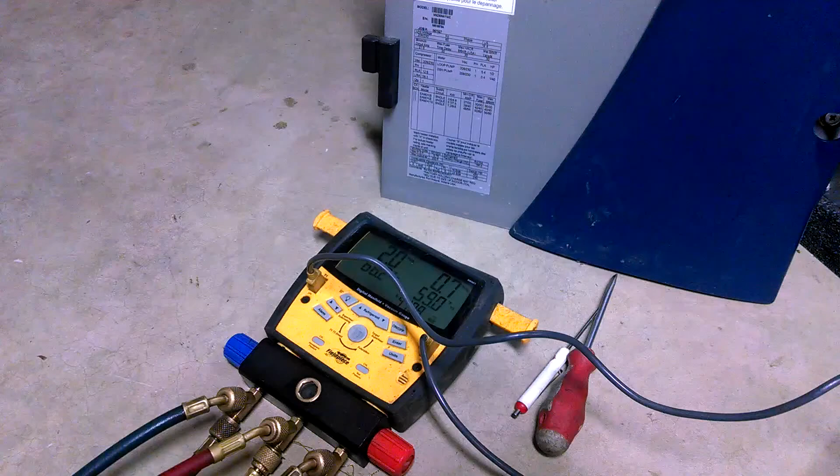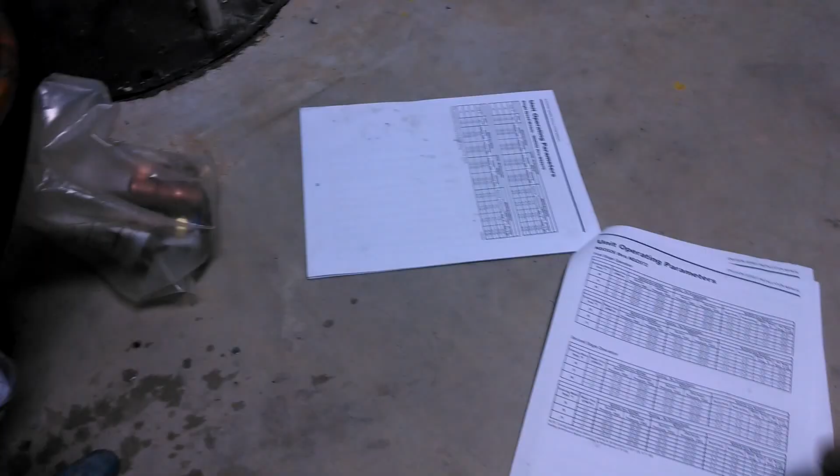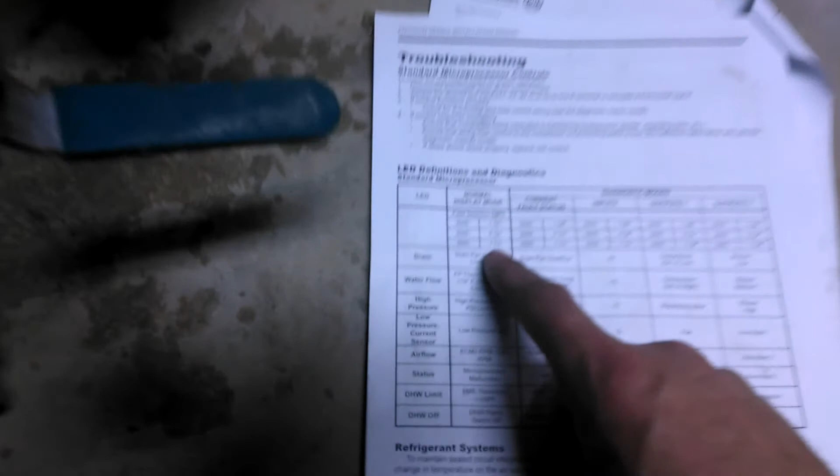I love them, you can do a lot of cool things, and what I'm going to go over is the dip switches. Only thing you really have to remember with these is SW21, SW26, and SW27. Very easy to service these things.

So come up here, this is normal display. SW21 is on. I got it all, I got this. Service it. Okay, that's normal display.

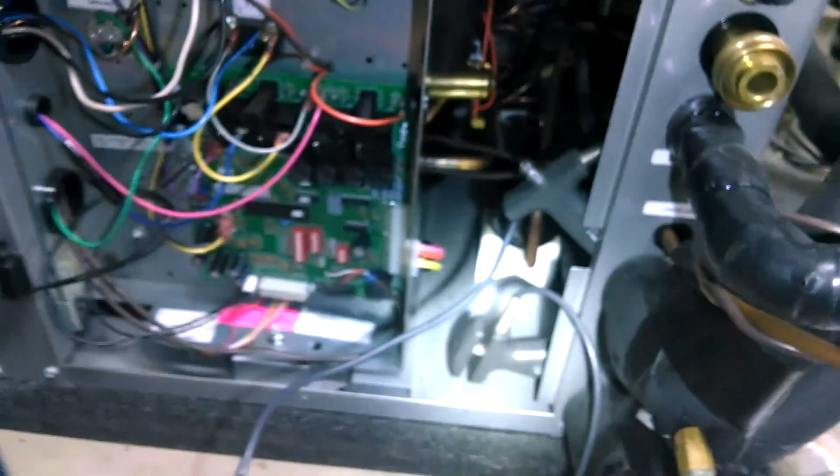On, okay. So what you're going to want to do to go into a current fault, very easy: one is off, one is on. This will put you in a service mode where you will shorten your delays. So there are no faults.

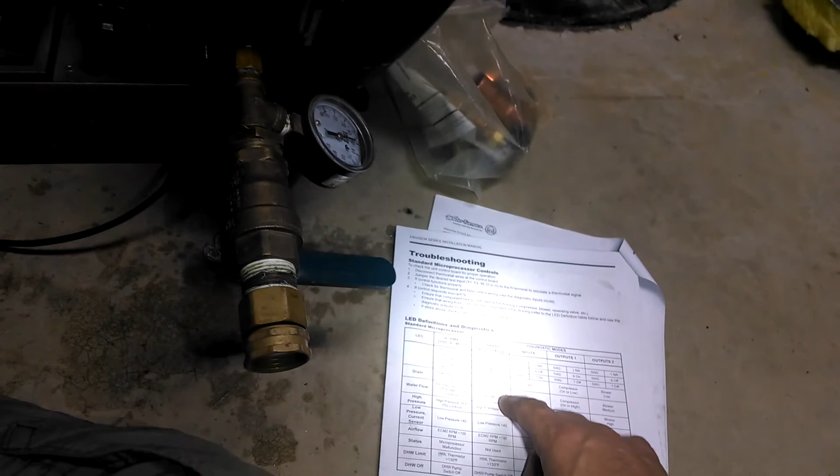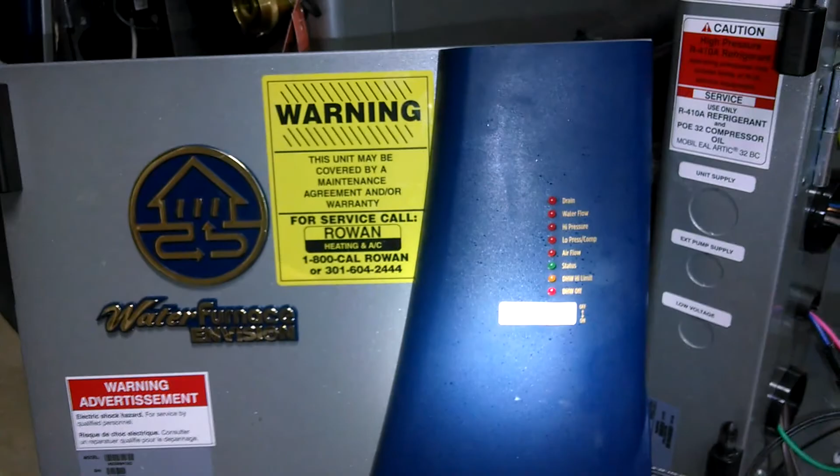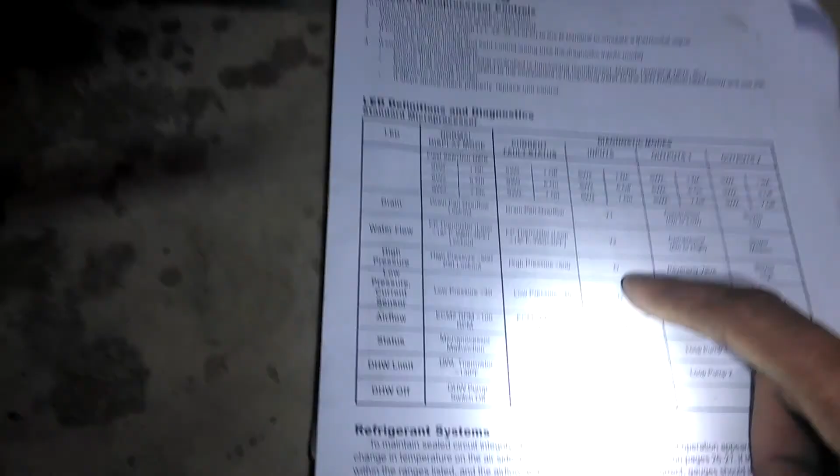So let's go to inputs. Off, on. This will tell us what our inputs are on. So we have drain, water flow, high pressure. We have Y1, Y2, and O.

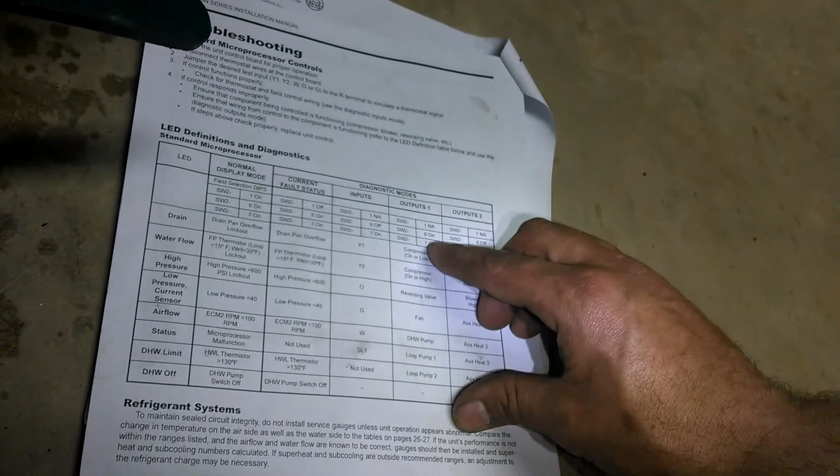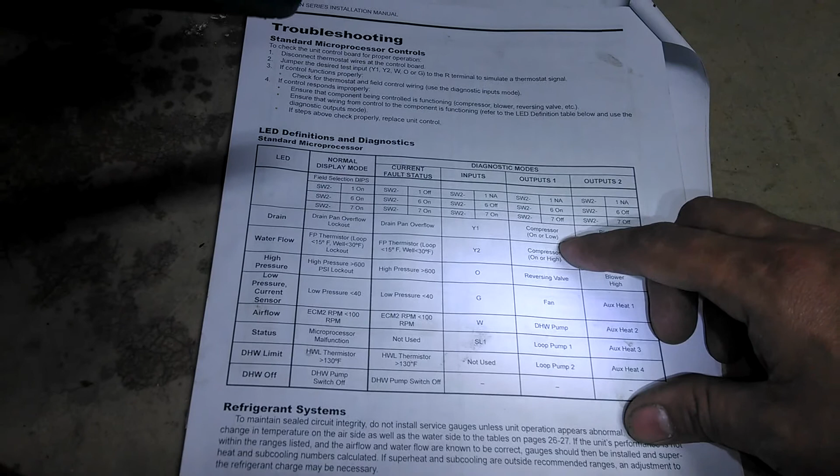Okay, let's go to outputs. Outputs, on, off. So we gotta switch these two. So let me make sure, on, off. We have drain, high pressure, low pressure, and status: drain, compressor on low, high pressure, reversing valve, fan, and loop 1.

Okay, so yeah, that's how to work that. The reason why the top, SW1, is NA here is because it doesn't matter. Leave it in the service mode, the off position. Leave it on the off position. It'll shorten the delays and really help you out when you're servicing the system.

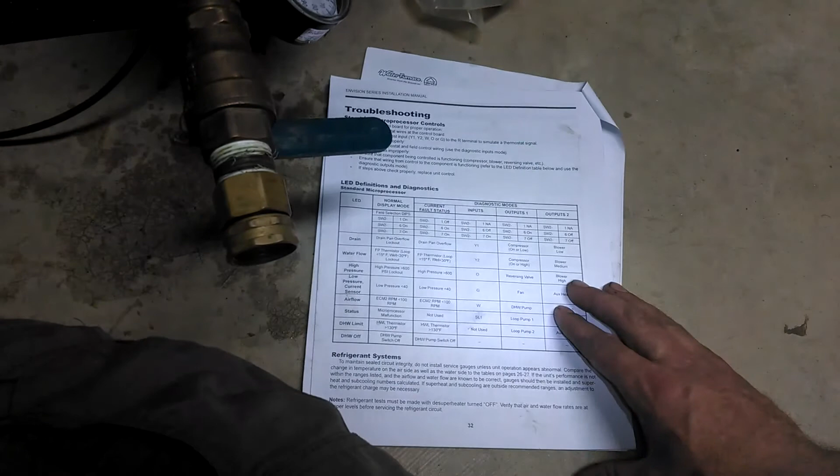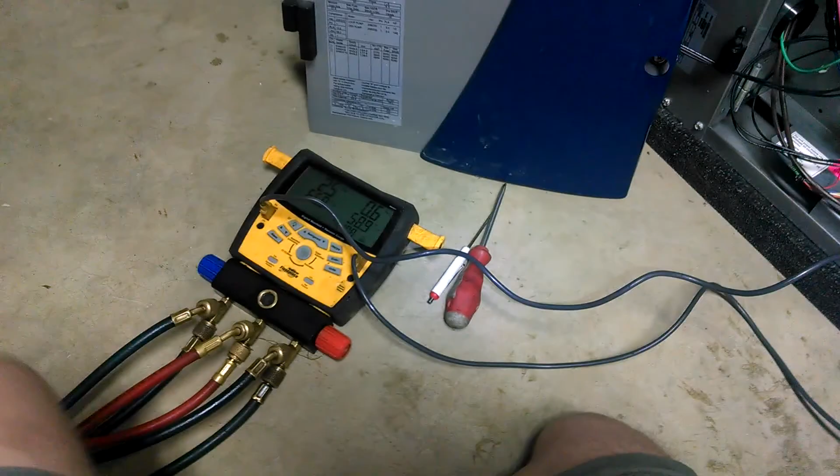Okay, so far as checking them out, everyone says, oh, I never hook my gauges up to a Geo unit. Well, I do. It's very convenient to have. I hook these up, my temperature probes right up to my loops. These are metal.

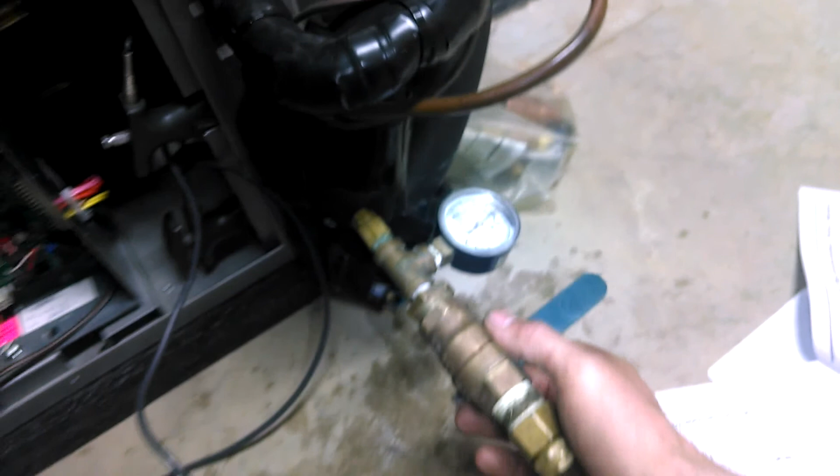Okay, this is giving me the temperature drop across, and this is just residual refrigerant from before, but this will give me my temperature drop across my loop, which is very helpful when you are trying to figure out if your flow is right, which will tell you everything. So what we do here, we have 47 psi. And we will go down here.

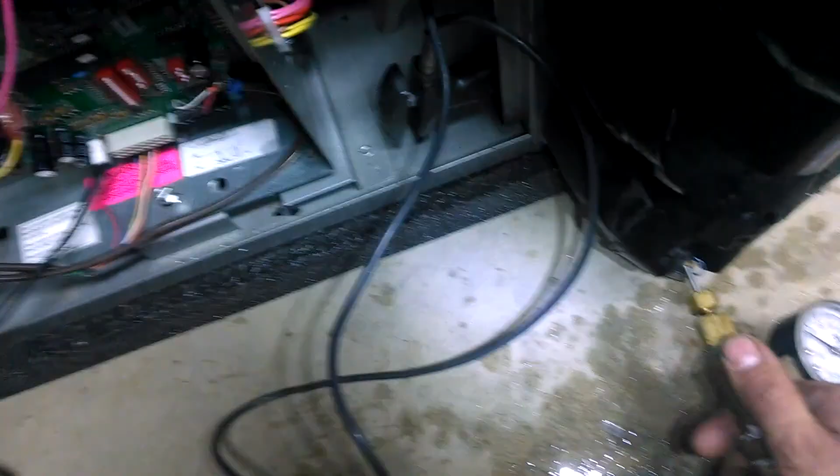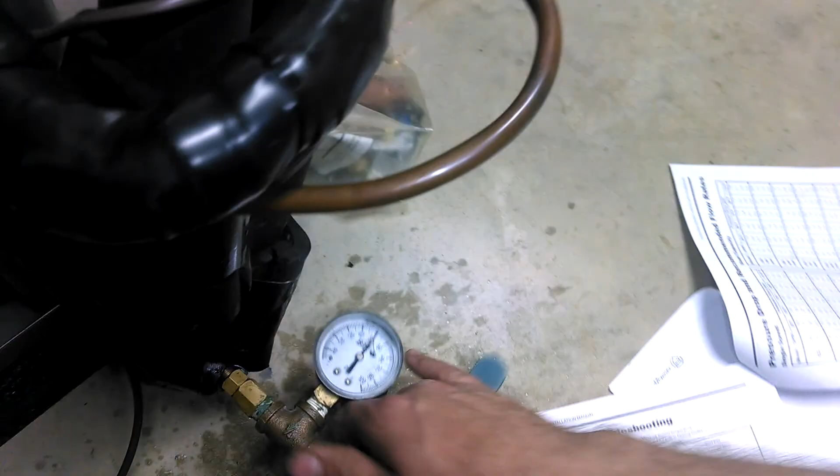This one's a little bit of a pain. If you want to slide these in as smooth as possible, you do not want to break that needle in there, it'd be a major pain. So we have 50 psi. So 50, 51. So we have about a 4 psi drop with a 50 entering.

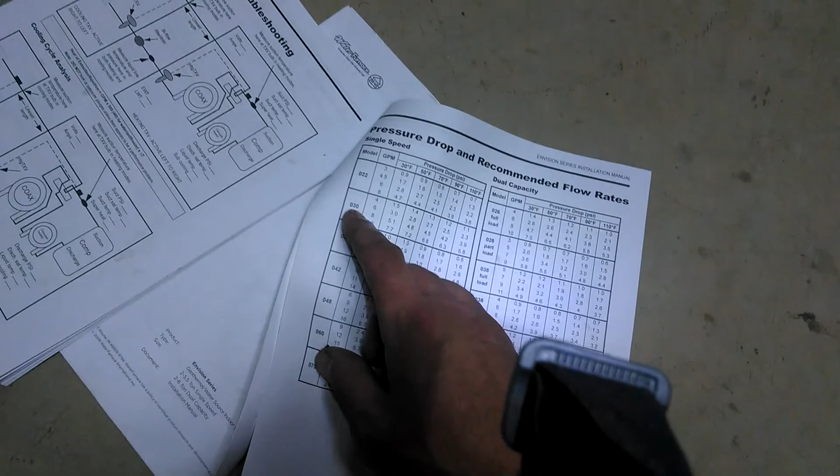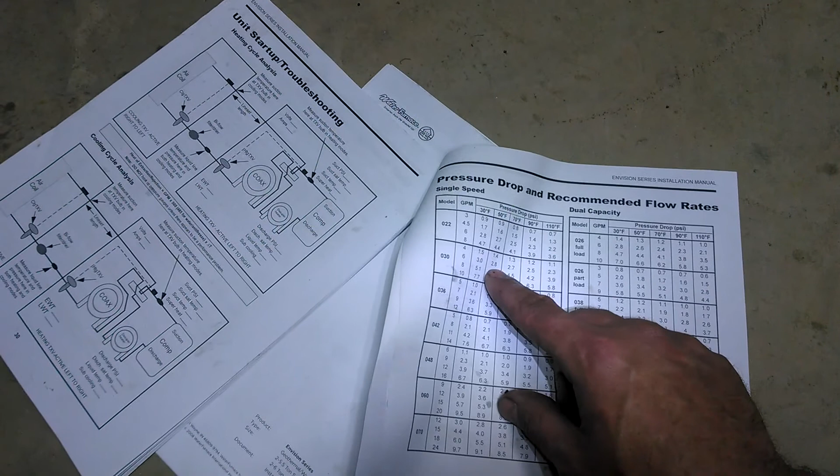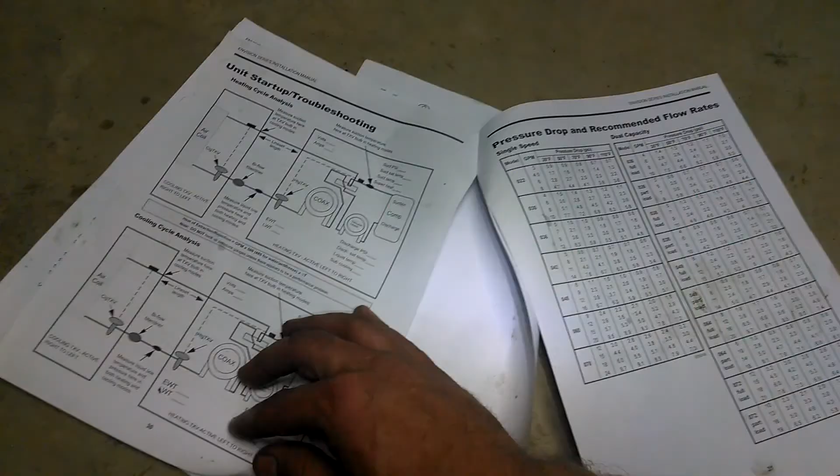So our unit's 3.0. So we go to 50, 3.0. We had like a 4 psi drop. So we have right about 8 GPM. So this is a 2.5 ton system.

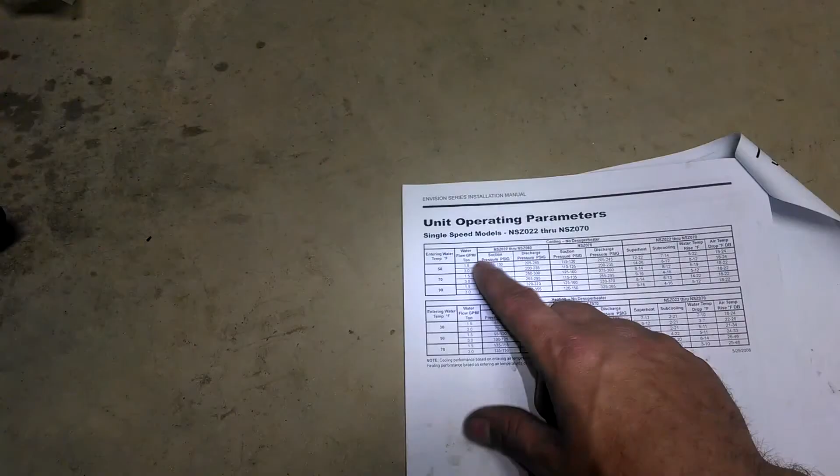Go a little further over here to our app. Here we go, so this is our equipment. You gotta look for your equipment, you don't want to go to the wrong one. Go to your equipment, 50 degrees entering water temperature, and this will give you all of your formulas.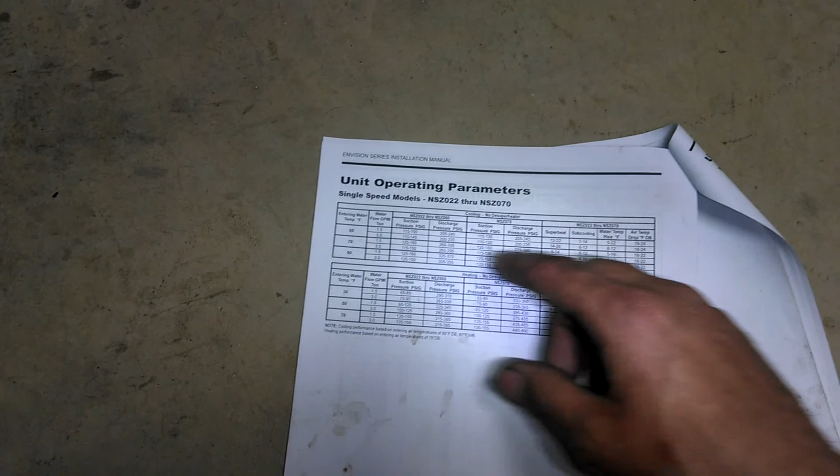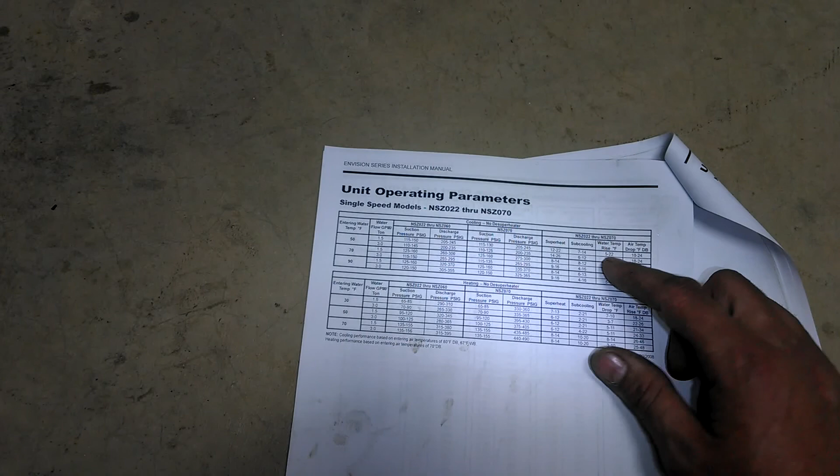Now this is what you got to worry about. If you are in this range, I have like about 2, so let's go 1.5. My water temperature rise is from 5 to 22 degrees. That would not be much water. I would definitely, if I had a temperature rise that high, but see, I have a 50 psi, so I think I will go upstairs and get a temperature drop, and if everything falls in range, I do not need to hook my gauges any further up to this piece of equipment.

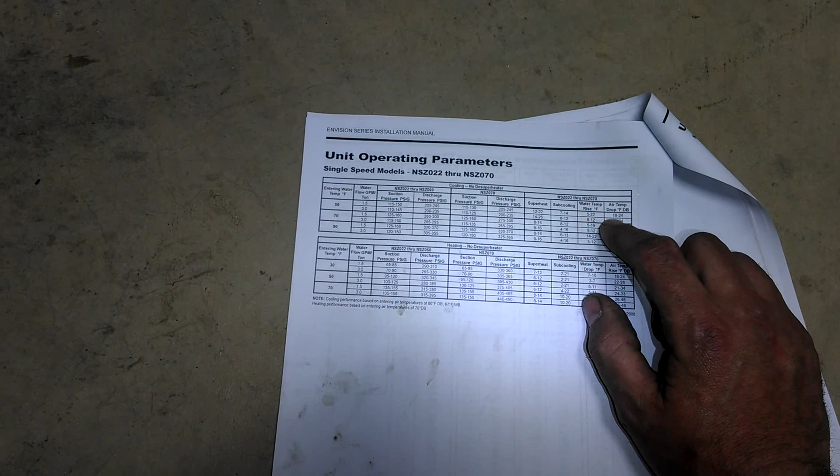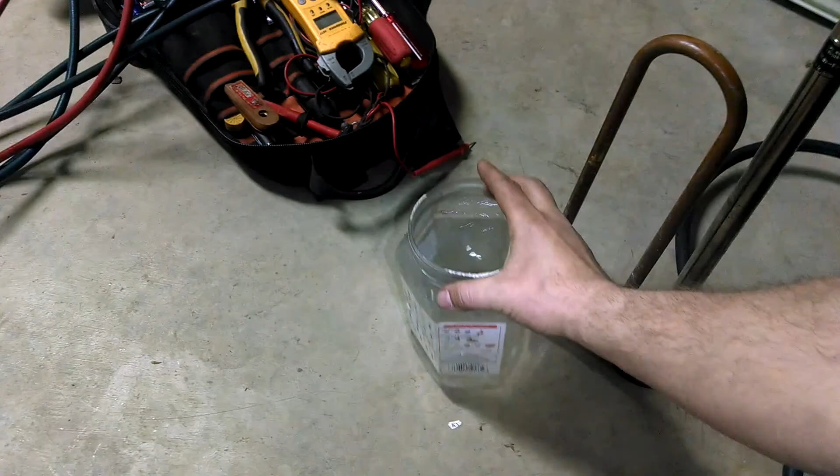So, if you wonder how I pressurize these things, it's very easy. You don't need to drag a hose in, don't drag a hose in. All you need is a refrigeration pump. And the refrigeration pump, to pump that much water, will fill up quite a bit of loops. I mean, you do not need much water to pressurize these loops. That will probably, when I leave here, I'll set these at 70 psi. Okay?

I will not use all this water. I will use part of the water.

So here's the problem with these refrigeration pumps. Gotta make sure you oil those balls. Okay.

I'll just show you all real quick. I'm pressurizing the loops, so I'm bleeding the hoses. Don't want anything in there, no air in this system.

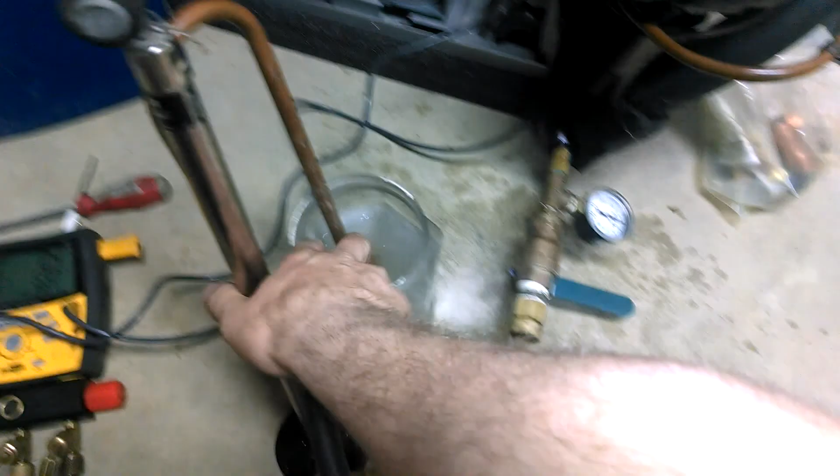I just ordered a new water pressure gauge, a digital one. I'm real excited about getting it. These just have needle probes.

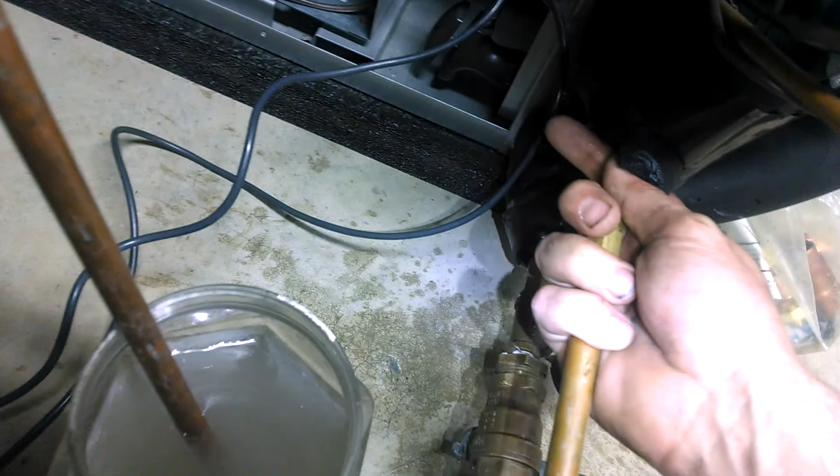Okay, let me show you. That's one pump.

Water does not compress. If you need a whole lot of water, you have air in your system.

I'll leave these around 70 psi when I leave. I'll recheck it after I put this water in.

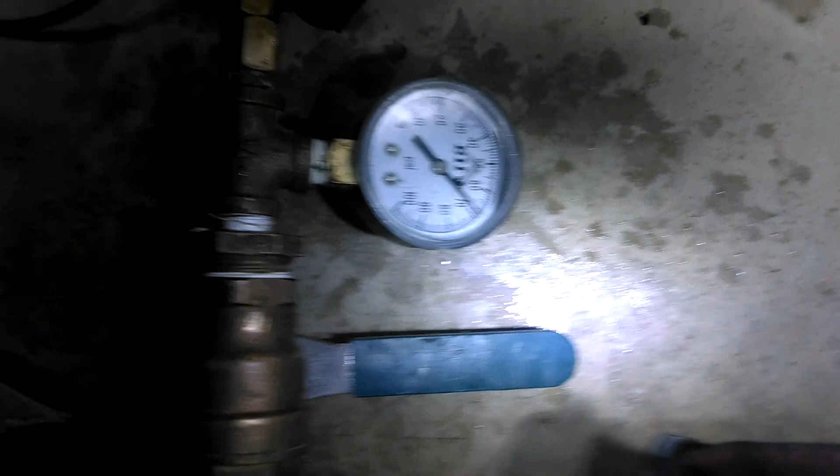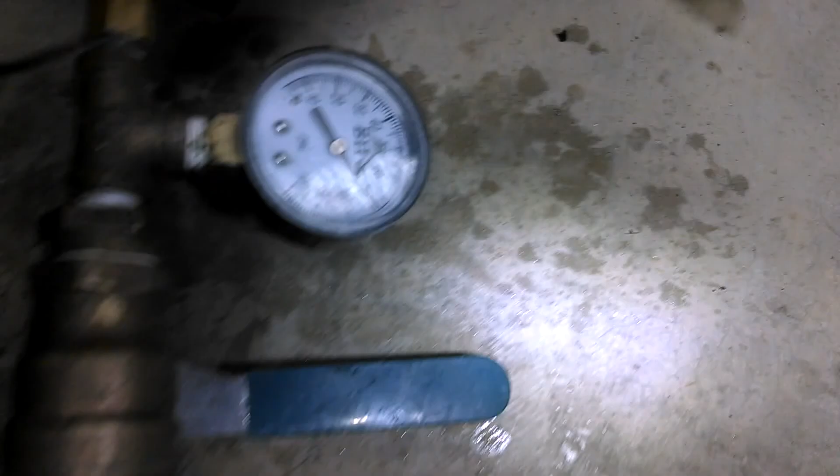Ball bearings inside the water pump stick sometimes. So here we go, see how much water I use. And this has 2 geos, 1 loop.

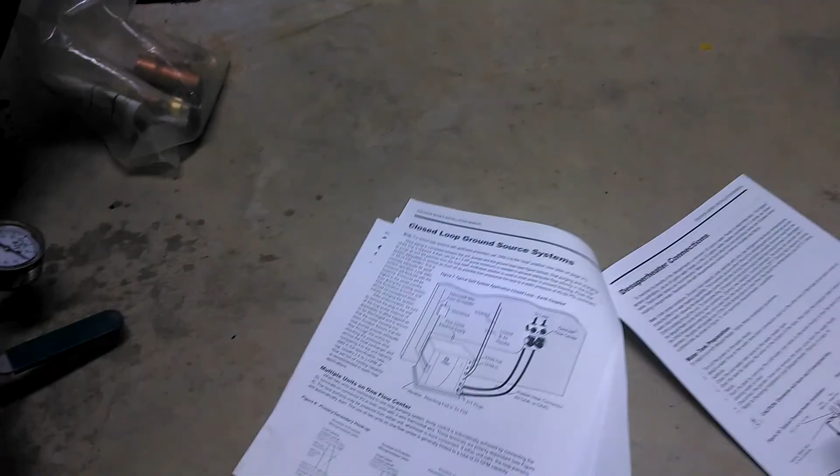Oh, and yeah, that's something else I want to go over - how to do that. It's very easy to tie these pumps together. Some people might have questions on it, and if you do, I'm going to show you. Very easy, it's right here, page 12.

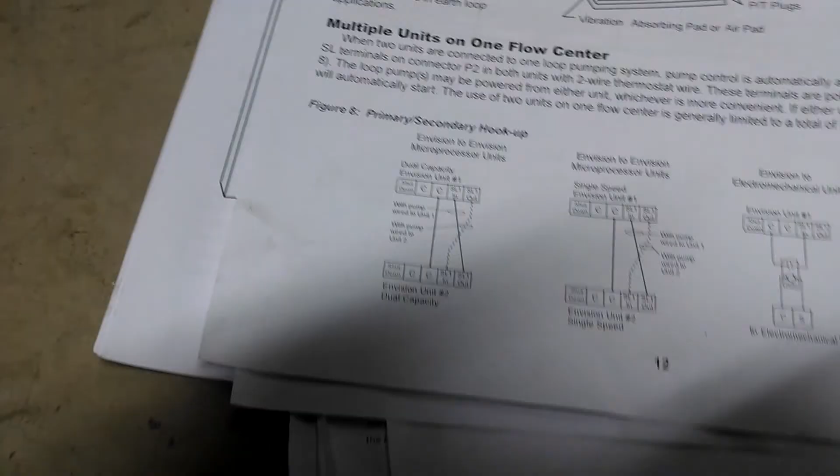Page 12, very easy. You go from one geo to the other geo. That's right there.

See that? You go from one to common. Where am I? One to common, one to in, and you go to common, and one to out. Very simple to hook them up.

You gotta have one in, one out. And what makes a difference is the one in - this is out.

So this is sending voltage to this one to tell that relay right there - well, not that relay, that junction - that goes to the circulator, the flow center. And I love these circuit boards.

These circuit boards are sweet. This circuit board, as you see, there's stuff not being used. All the WaterFurnace does that. You know, all their circuit boards are so far advanced. Their Envision 7 series is really cool.

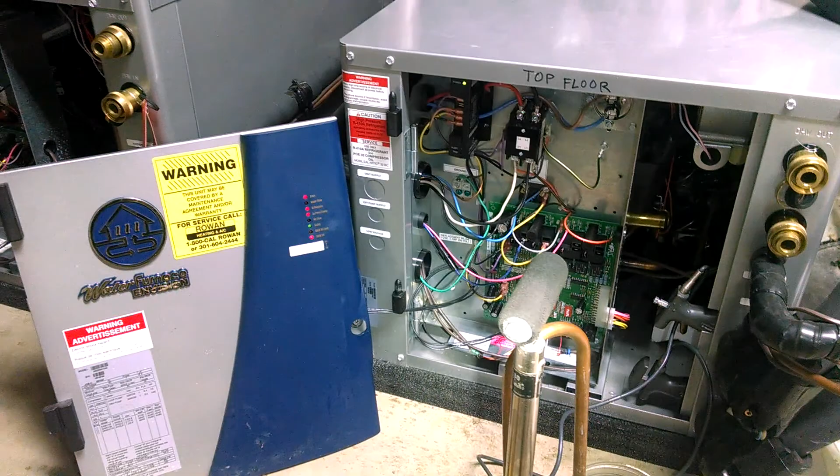It's a real quick demonstration of Geo. I hope you learned something. If you have any questions, just go ahead and ask and I'll help you out.